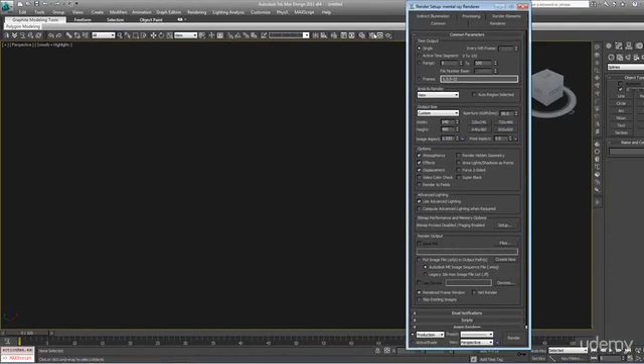One thing we need to do first, depending on your setup, if you already installed V-Ray, your renderer might be set to V-Ray here in the render setup button, assign renderer. For now, let's just make it the default scanline renderer. This comes with Max, so I know everybody has that.

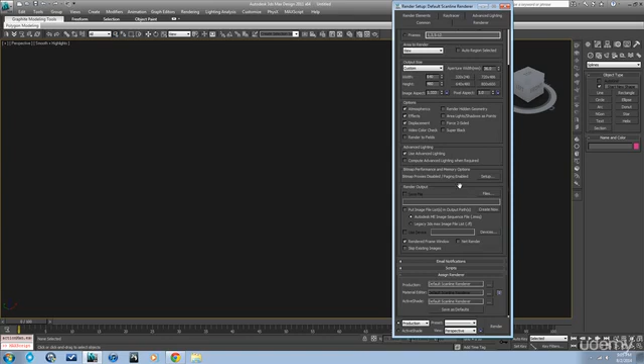For what we're about to do, it doesn't really matter what kind of material we're using. So if you take a standard material, make sure it's set to standard here. Click on it, it'll give you all your different options. Standard is the most basic, and again, everyone should have that.

Now, I don't want to go into a deep lesson about materials yet because we'll get to that later, but just follow me. In the diffuse slot, click on it, go to Maps, Standard, Bitmap.

I've navigated to the folder where I have my sketch saved. If I just click on it like that, it brings it in. Now if we double click on the material slot, you'll see my sketch there — this is a swatch of our material. By the way, I've saved this sketch with the supplemental materials for this lecture, so you can download it as well and follow right along with me.

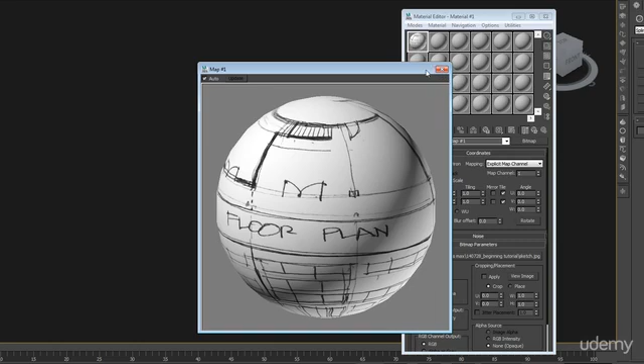Inside this bitmap that I've placed in the diffuse slot, you can view the image like that. Like I said, I drew this pretty quick — not my best sketch ever, clearly. Then we'll make sure use real world is off, and set it to tiling 1 and 1. We'll see what that does in just a second. Okay, let's close this for now.

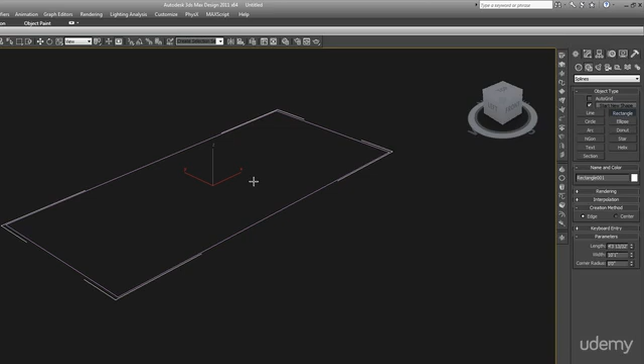Let's draw a little rectangle, and we could either right click and convert to edit poly — yeah, that'll work. Now if we go back into our materials, hit the material editor button on our main toolbar, go here, and with this polygon selected, hit this button, assign material to selection. Boom. Now also in the bitmap, this is our overall material.

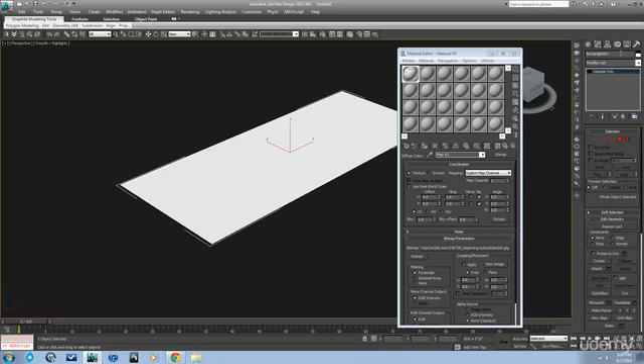We go inside this bitmap here, and if you click this button, show standard map in viewport, that means it'll show up on our object. If we put this material on this object, it'll show this particular bitmap, this one right here. But we've got to map it first, so let's hit our UVW map modifier, or go up here to the modifier list in the modify tab, UVW map, and now you can see it showing up.

Let's tumble around a bit. In fact, okay, we can close this down and let's go to the top view so we're looking directly at it. As you can see, this looks a little too blurry.

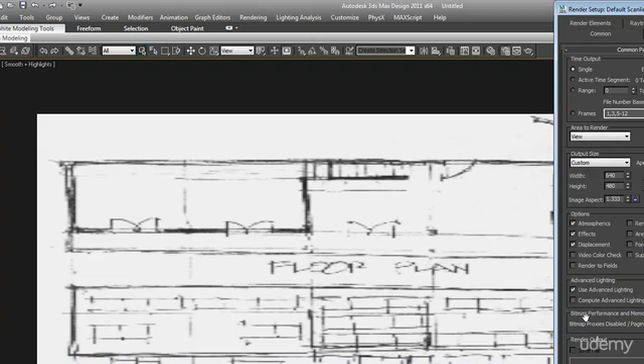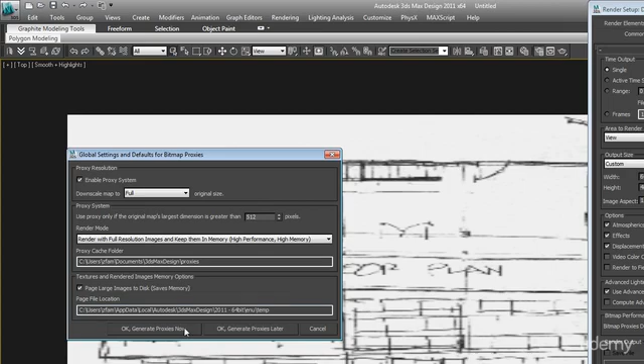So one thing that we need to do is go into render setup again, and there's something here called bitmap proxies. If you go here on the common tab and go to setup of the bitmap proxies, you can enable the proxy system, make it full of the original size of the bitmap. And then that makes it so that's displaying at full resolution.

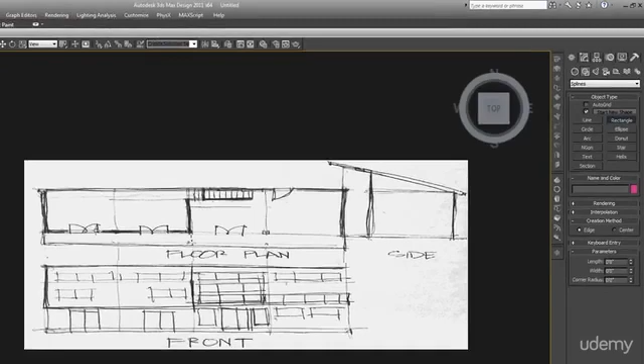Okay, now when you have a sketch like this, you need to make sure that you have something to base your scale on. Since I did this sketch myself, I know that I want each one of these modules of my house — this is the floor plan. Hopefully this will make a little more sense as we go along, because it's not a great sketch, but I did it fast for the purposes of demonstration, and it'll show us that you can use almost anything to draw to help as a guide when you're drawing. So I want 20 feet by 20 feet.

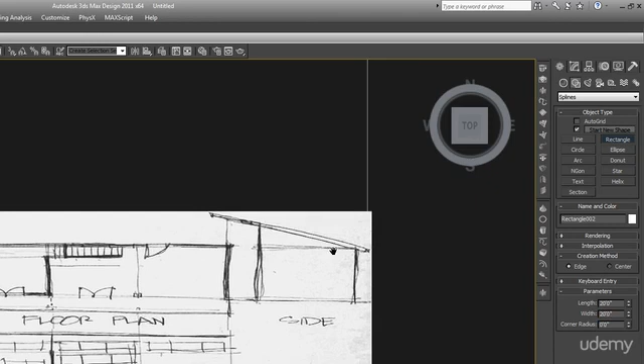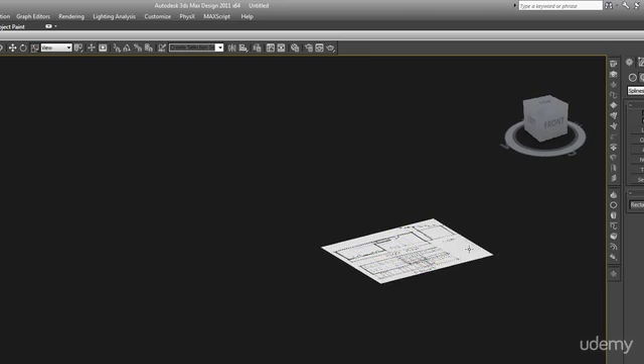Now I can scale this so that one of those sections I have ends up becoming 20 feet by 20 feet. Now, one thing you need to do is make sure that — let's move this down in the z-axis so that my rectangle is in front of it. That way we'll always make sure and see the rectangle. You can kind of see it there.

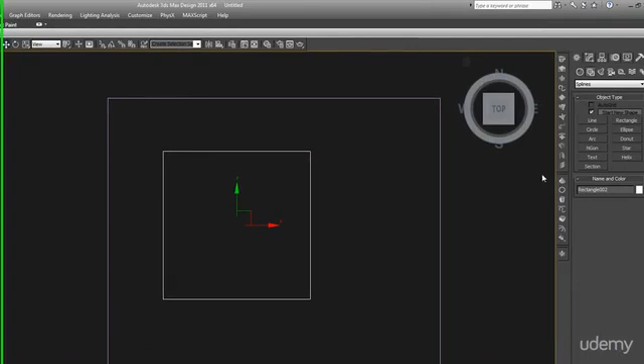I hit F3 just now to turn off the shading. If I select this rectangle, enable it in renderer — just go into the modify tab, enable in renderer, enable in viewport. Let's make it really thick so we can always see it for sure. Now go back into shaded mode, and there you go.

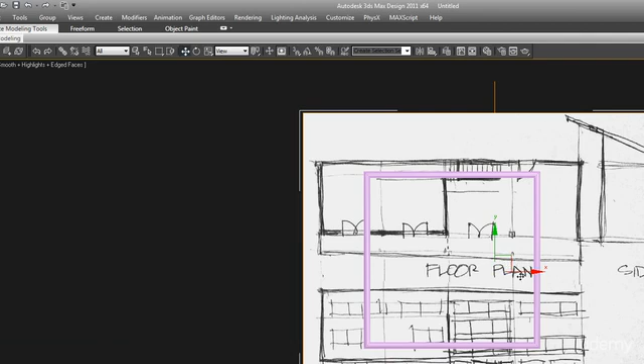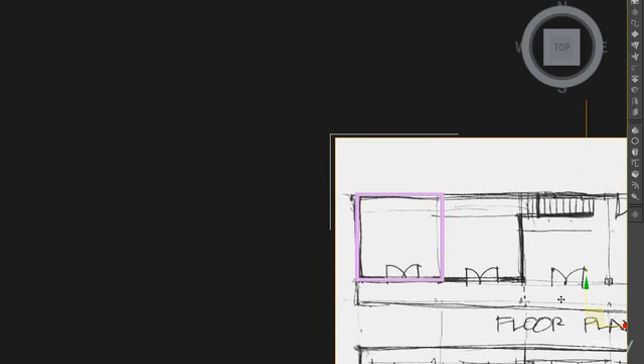Now we move this into place here, and let's just keep scaling it until it fits. One thing we can do here — that's about right there. Now we need to scale it in this direction. That's almost it right there. Okay, so I've got my 20 by 20 squares. So this thing is kind of all scaled now.

Okay, so I now have a floor plan that's to scale. Now, how are we going to get the elevation? Well...

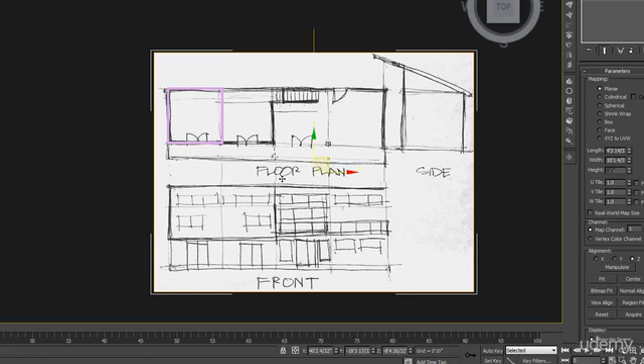One thing we can do, since this is an edit poly, is go in. I want to still show that image with the mapping even though I'm editing the poly, so I hit show end result on and off. That's basically applying this modifier even though you're down here in the edit poly.

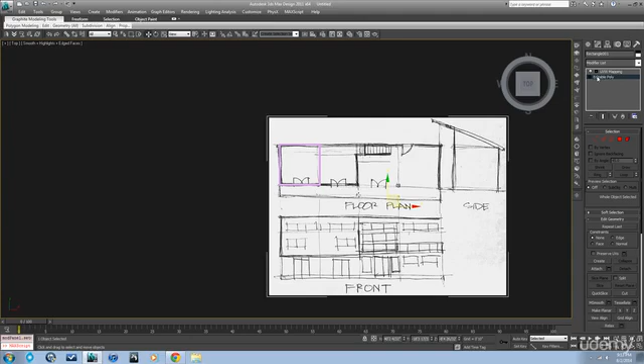You can take this now, take the vertices and move them up, just like that. Take these vertices and move them over, because we don't need that.

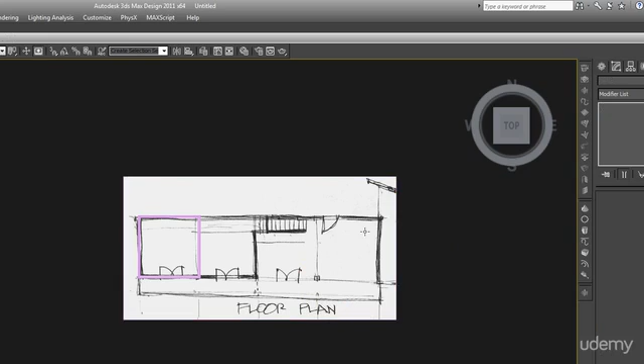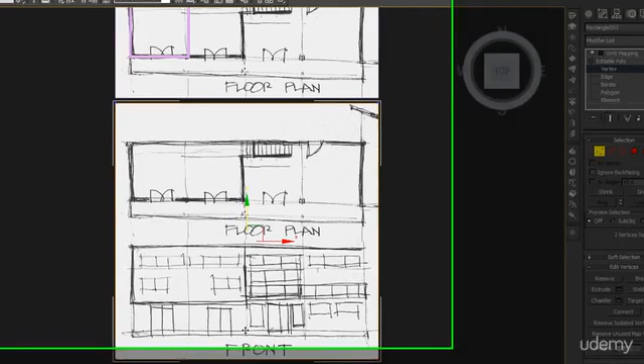Now if we copy this, let's go into here and again show end result, and let's get just that front elevation there. Just like that. Now we have a nice front elevation. Let's copy it again.

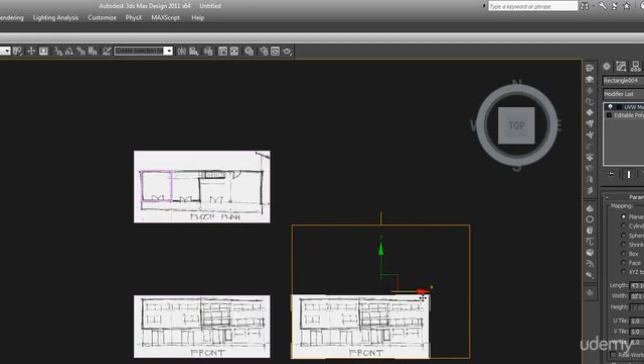Because we're keeping that same UVW map on there, everything's remaining at the same scale as the original one. So let's go into here, show end result, and we want to expose that side elevation - we've gone too far over there. You probably couldn't even tell it was a side elevation, but that's what it's supposed to be.

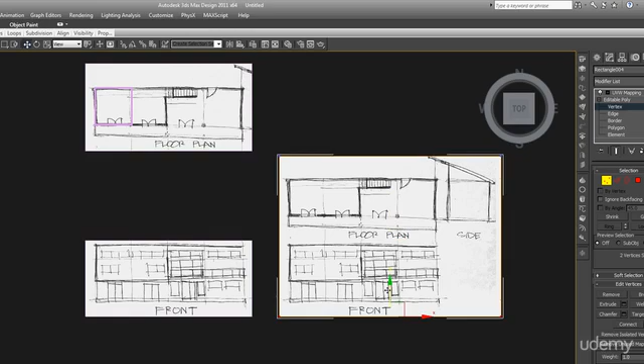Now everything's going to be to scale here. So this is one way of doing it. There's a lot of ways of doing it, but the thing is, you've got to make sure that everything is the same scale. Then you can line them all up and draw to it.

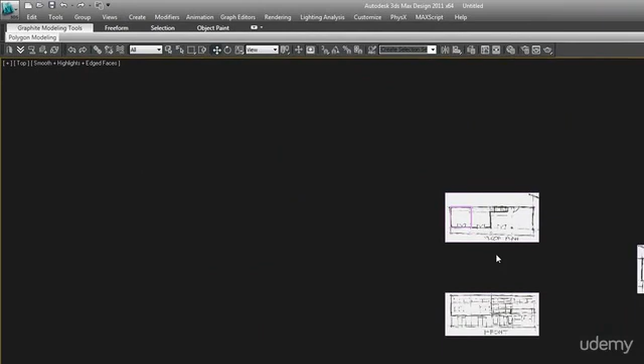Now, if you were going to do CAD, you do the exact same thing, but what you do is import a file. Let me navigate and see if I've got some good CAD to bring in. Okay, I have this CAD drawing, and I went to import and find a DWG file, and let's see what happens when it comes in.

One thing that's important when you're dealing with CAD is to make sure you take out all the blocks and all the hatches and any information you don't need, because it bogs down 3D Studio Max really bad. So you want to make it as efficient as possible. You can see it already taking a long time importing.

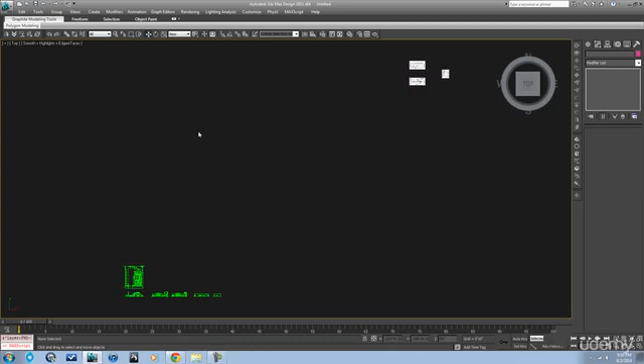Okay, I hit OK when it was importing, and I just used the defaults. Here you can see these come in basically as splines. See, that's an editable spline. You won't want to edit it at all - you're just using it to draw to.

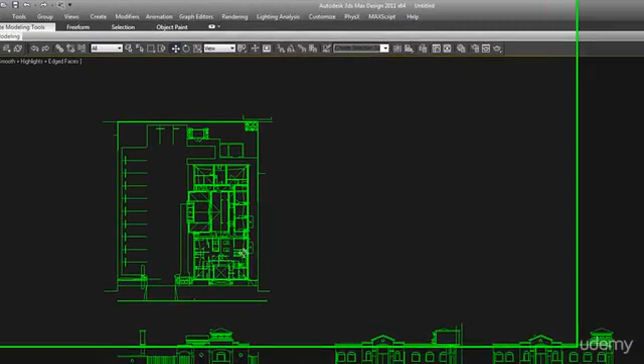Now the nice thing with CAD, of course, is that you can snap to it. So what I usually do is bring this in, put it on a frozen layer. This floor plan you can put down, so you can draw on top of it. Let me just show you as an example.

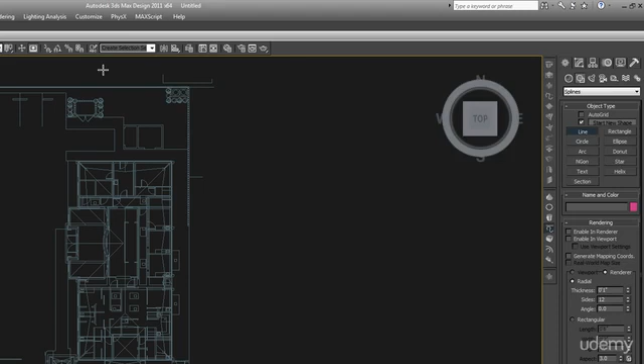Let's just freeze this individually - freeze selection. Now you can take this, go to lines, go to 2.5 snap. Quickly I'll explain: 2.5 snap will be drawing on a Z of 0, but it'll be snapping to this floor plan even though it's below Z of 0. It's at negative 47.6, so it's down below, but we'll be drawing on the 0 plane.

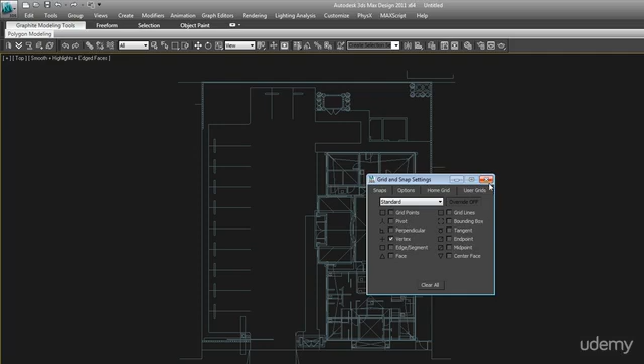And if you set up these - if you right click on your snaps, you can go to what you want to snap to. If you're snapping to CAD, you always snap to a vertex. That's what all these little points are on this thing. And then you can just draw right onto, well, trace right over your CAD. So CAD is the nicest thing to use because you can draw right onto it.

And you can see this was drawn at the 0 plane up here, and the CAD remains down there so they don't get in each other's way.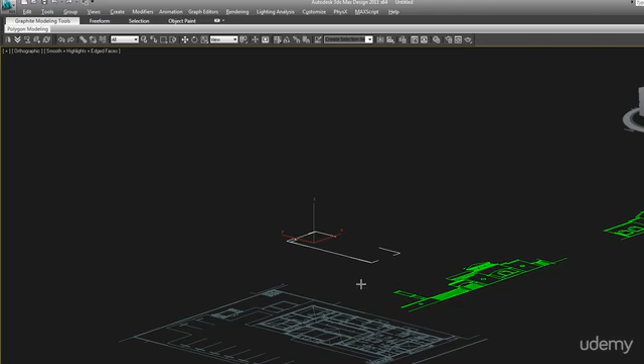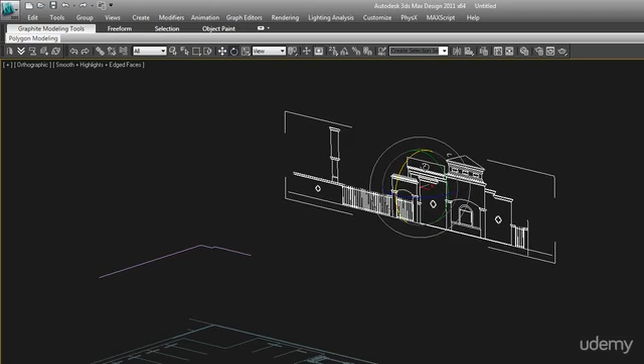And obviously you can take this elevation, set it up like this. You can take it and rotate it 90 degrees - this is where the snap would be nice. Can't get it. Rotate along the x-axis 90, or was it negative 90? Nope. Undo.

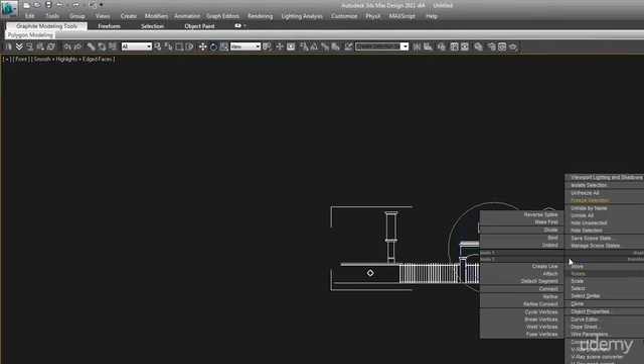Okay, now you have a front elevation that when you go to the front view you can draw right to again. You want to make sure that it's behind, at less than 0 in the y-axis here, so that when you draw - I'll show you again - freeze selection.

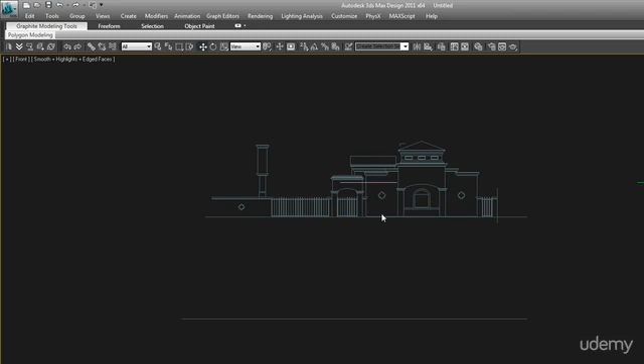Okay, we're way over here now. And actually, you want to set this up so that the ground plane is right where we were drawing the ground before, right there. So that ground plane is at 0. Freeze it again. And then you can just start outlining all this stuff.

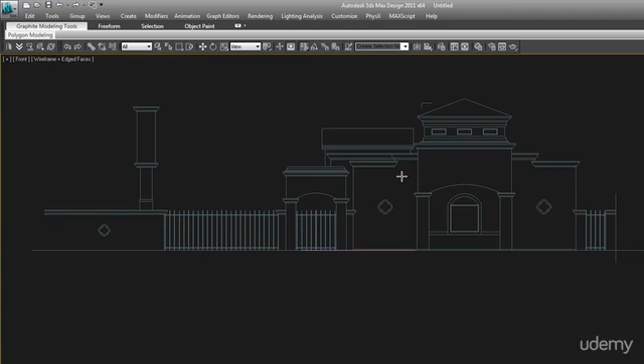Snapping to all the vertices. Oh, that's a bad one there. Okay.

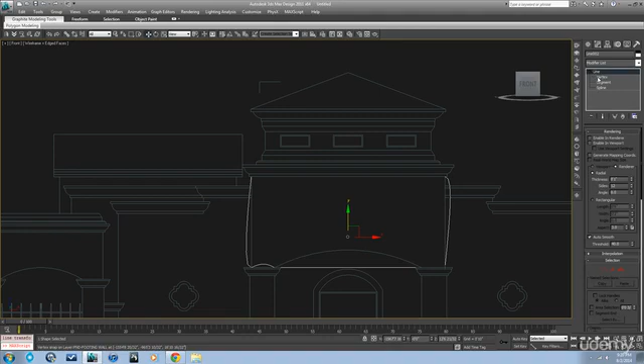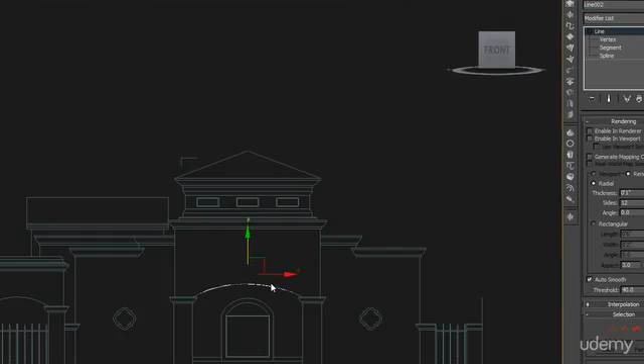Now what I would do is right click, go into vertices mode, select all these, make them corners like we've done before, and then take these two and make them Bezier corners, and then start adjusting, right, so that it's matching that. And you can see, okay, something's not right there.

So this is what I was talking about. You want to make sure that this is back here behind where you're drawing in the front mode. That way you can always see it in front of that. So then if you extruded this, you know, that'd probably be like an 8-inch thick wall. And there you go - there's your first wall.

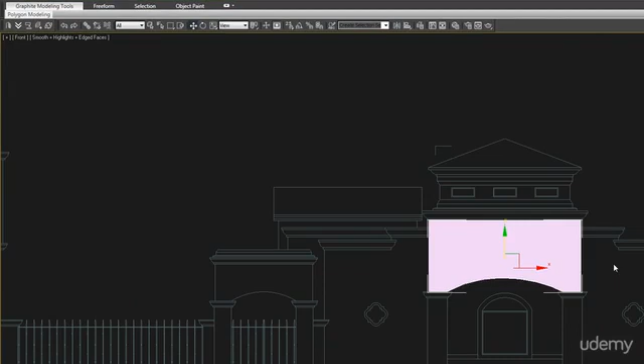So you can see CAD is nice and clean - you can snap right to it. And then you just have to put elevations on all sides and draw to them, and then line them all up on this floor plan, so that wall I just drew I would bring right up to there, because that's where it matches on the floor plan.

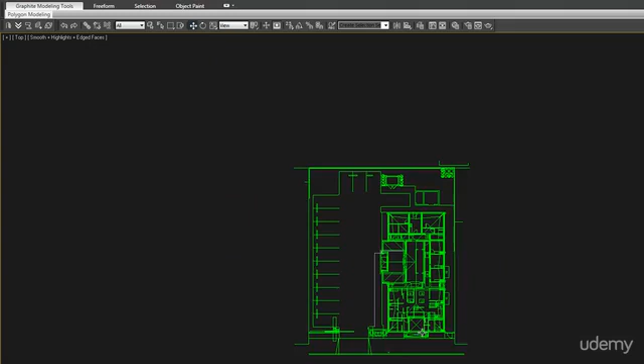And eventually, as you start building all the elements of these things, you have a building that appears. But like I said, we're going to use the sketch, so in the next video I'm going to put that together for you and we'll move forward from there.